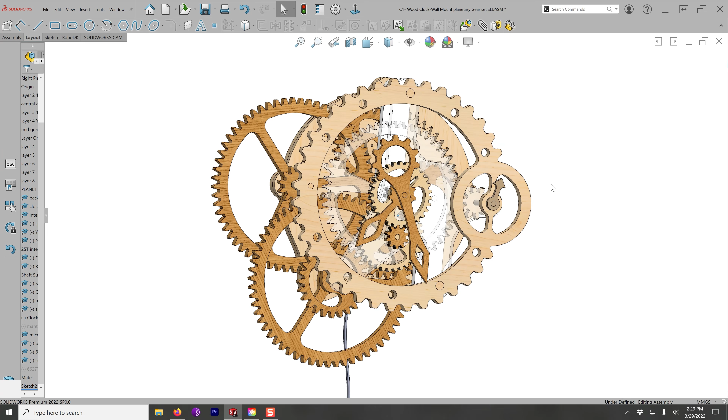I was digging through some old CAD files and I came across this design I made way back in 2014. Now at the time, I knew almost nothing about engineering. Well, even today I'm entirely self-taught. But looking through the lens of experience, I can see there are several things that I would have done differently had I made this clock today.

For example, the planetary gear in the back actually drags against that wall as the clock is spinning. Not only is that going to produce a lot of noise, but that's increasing the friction, making the clock work harder. That's one of the things that I intend to change about this clock.

Despite all of its flaws, I still think this design is very beautiful, and I would love to bring this thing to life. So I decided this would be a great opportunity to teach you guys a little bit about how gears work, and then also bring you along on this journey as I bring this clock to life. Let's get started.

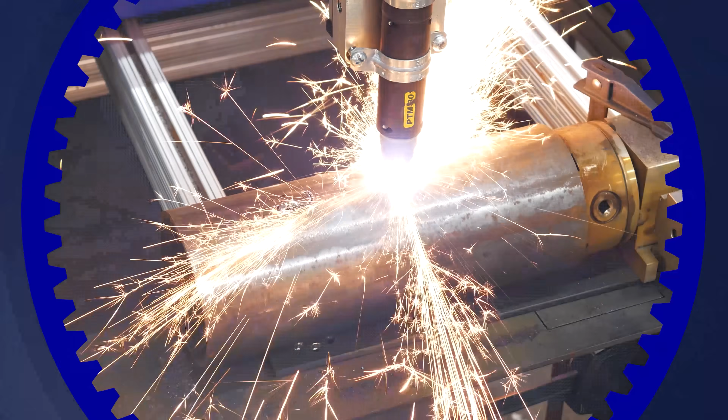Before we start building the clock, let's talk a little bit about gears. Now, when I wanted to explain this concept to my kids, I basically built the most ghetto seesaw you've ever seen, and we just experimented with it. If you've ever been on a seesaw, then you know what it's like to sit opposite of someone who doesn't weigh the same amount that you do. You intuitively shift your body weight forward and back to try to balance out your weights.

But what you're actually doing is balancing out the torques. Torque is a combination of the force being applied to the lever times the distance from the center of rotation. In this example, you can see my kids quickly figured out that if you have twice as many bricks, then the lever needs to be about half as long. The same thing is true with any sort of lever.

And now I want you to think about each tooth on the gear as being an individual lever. Since the motor connected to this gear has a fixed amount of torque, increasing the length of the lever means you decrease the amount of force that can be applied at the end in order to balance the equation. The same thing is true for all forms of mechanical advantage, including pulleys.

Looking at this pulley, for example, the center of rotation to the groove is the length of our lever. The motor itself has a fixed amount of torque. Therefore, in this case, we take the motor's torque divided by the length of our lever, and that's how much force we can apply to the belt.

So let me give you a pop quiz. If we put this pulley on the motor instead of this pulley, what do you think is going to happen? Hopefully you're saying to yourself, you should get way more force output on the belt for this one than this one. And you will be correct. The force that you can apply on this pulley with the same motor is going to be way higher.

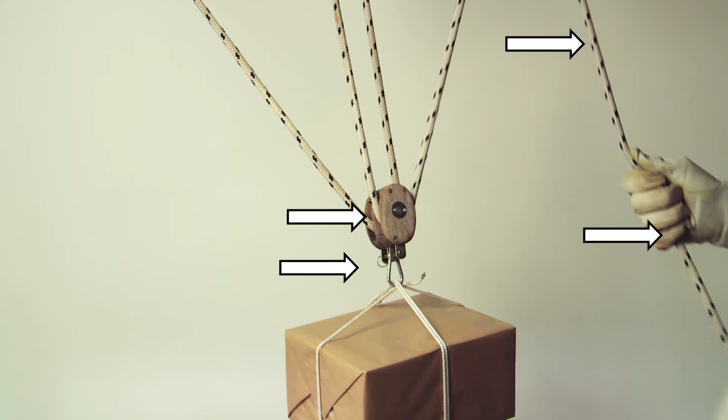Hopefully this will dispel one of the very common myths that I run into, where people think that you can just take pulleys or gears and increase the work output. That's not what these things do. There's something being given up with each one of these exchanges. With the block and tackle example, you can lift twice as much weight, but you have to pull twice as much rope through the pulley compared to the distance the load actually moved. Let's make one solid example so you really have this fixed in your mind. We have a GoKart. It can carry 100 pounds and drive at 20 miles per hour.

You can make those units whatever you like. This could be 100 kilograms and kilometers per hour, whatever makes you feel good. The key here is gears allow you to trade one for the other. So we can lower our carrying capacity if we want to increase our speed. And this would very likely be feasible with gears. You could cut your towing capacity in half and double your speed.

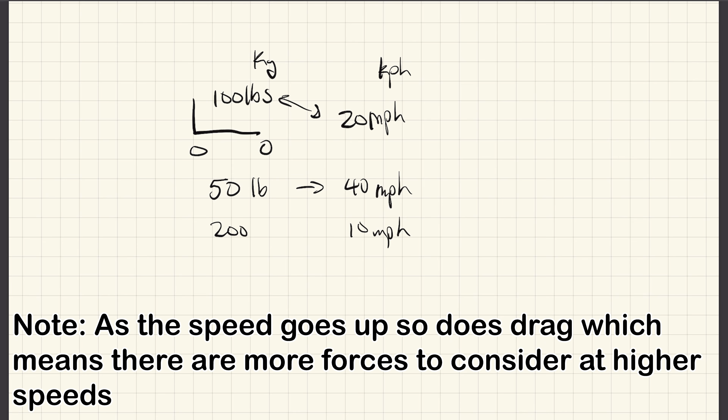The same works vice versa. We could cut our speed in half and double our towing capacity. But what you cannot do is leave the capacity the same and try to increase the speed with gears. This won't work because you need more power in order to increase the total amount of torque and speed combined. That's the definition of power actually, is speed times torque.

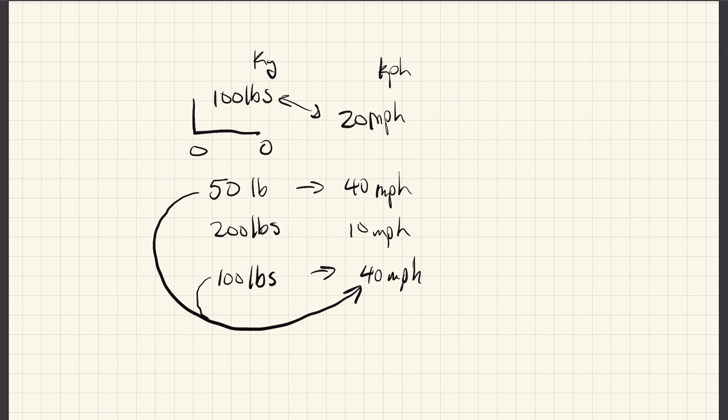Now, we can certainly get the wheels to spin at 40 miles per hour as long as the load is below 50 pounds. But if you try to carry the full 100 pounds, you're not going to get this go-kart to spin. In fact, it's just going to stop dead because there simply isn't enough power available. This kind of system would require a larger motor because you need more power.

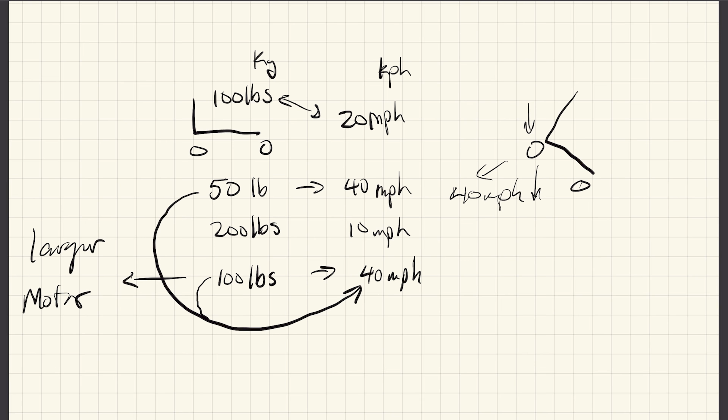If you took that same go-kart and you lifted up the back wheels, there's no load on these wheels. They will definitely spin at 40 miles per hour. But as soon as that go-kart touches the ground, it's dead in the water. It's not going to move. This is the trade-off that you're always going to experience with gears. They don't give you more power. They just allow you to trade speed for torque.

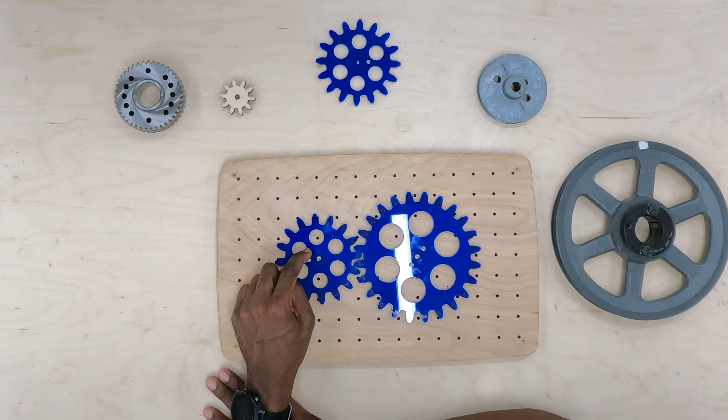All right, now that we have that down, let's go back to the clock. What makes the clock such a beautiful example of gears in action is because we need several different components to spin at different rates. And what better way to get those components to spin at different rates than with a series of gears? So let's make this gear our drive gear. If we attach our motor here and we start to spin this gear clockwise, two things are happening. Number one, the output gear is spinning counterclockwise. That's important for our clock.

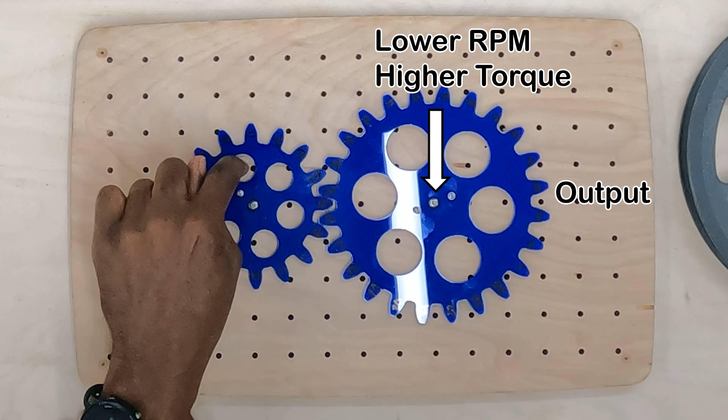If we want all our hands to spin clockwise, then we need to pay attention to which direction the output gear is spinning. The second thing you should notice is that this gear has a lower RPM. It's spinning about 2/3 the speed of our input gear. And that is directly proportional to the number of teeth. So this gear has 16 teeth and this one has 24.

If we switch this around and put the motor on this side, we'll get a higher output speed. In fact, we'll get 1.5 times the speed on this output gear, but we're going to have less torque or less lifting force to move our load. Finally, if you just want to flip the direction of your output gear, you can add one more gear in the series. And I don't have a pin to put that in place, but I'll just hold it like this.

And as you can see, even though this one is spinning counterclockwise, any gear attached on the outside, if I could hold it in place, there we go. As you can see, this one is now spinning back clockwise. This is the trick we're going to use to make sure that the output of our clock spins all the hands in the right direction.

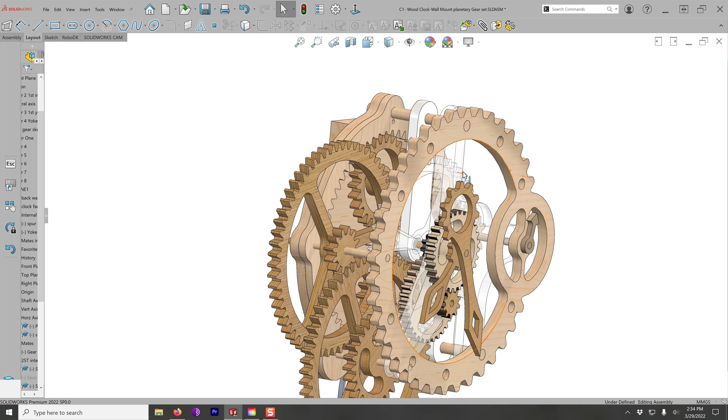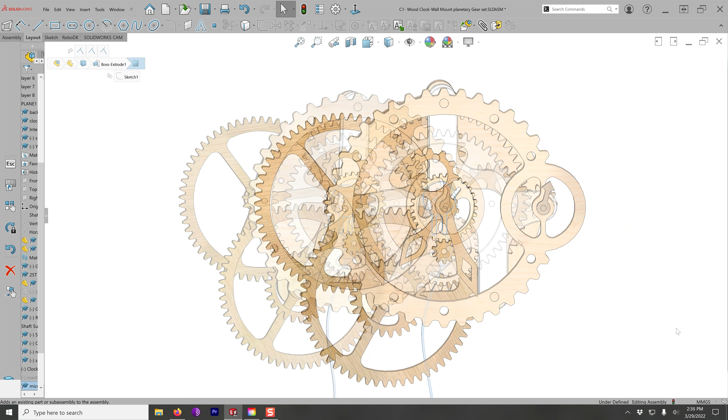Most of the gears, as you can see, have very large openings, which will allow you to see all the way through the clock. There are also way more gears than you actually need in order to change the 6 RPM of this little microwave motor to the speed needed to get the minute and the hour hand moving at the appropriate speed. One of the first things that I want to do is maintain that original transparency. One of the other goals that I had was to make all the teeth large enough that I could cut all this on a scroll saw.

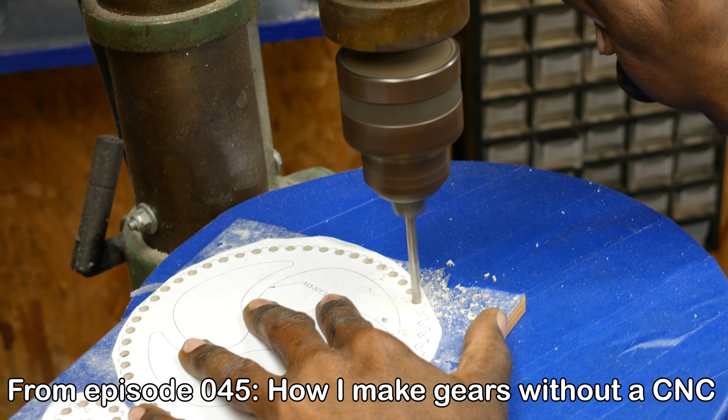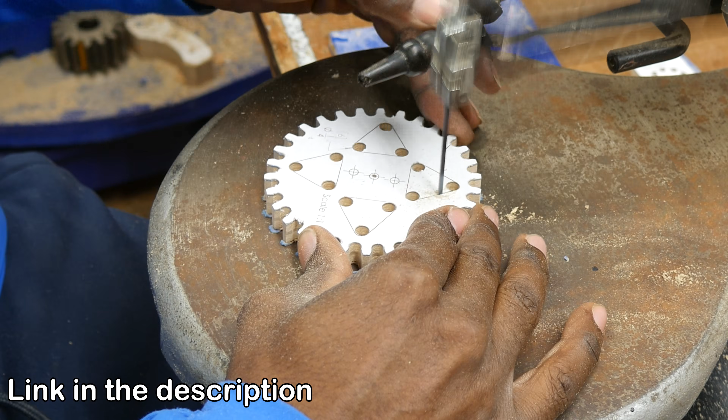This was before I had a laser cutter or CNC or any kind of tools that would allow me to make very precise gears. I wanted to make sure that the teeth were large enough that I didn't kill myself trying to make each one of these. But I also didn't want to have so many teeth in one gear that if I made a mistake, I'd have to scrap the whole gear and start over. It's one of the problems with making these gears by hand. If you have 96 teeth and you mess up just 2 or 3 of them, you've got to start over making those 96 teeth. And that's just awful on the scroll saw.

But today I don't have that problem, so I could change these to accommodate a higher number of teeth per gear, but I think the clock looks great the way it does, and so that's not one of the changes I want to make. As I mentioned in the intro, I need to beef up this connection here so that these gears can be cantilevered and not rubbing against this face on the back. I'm going to add a spacer here.

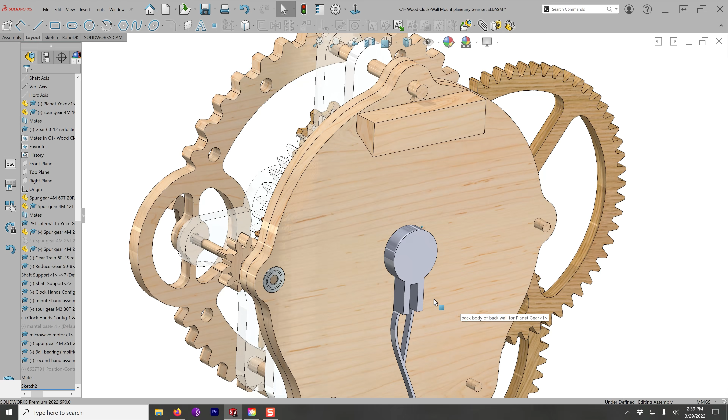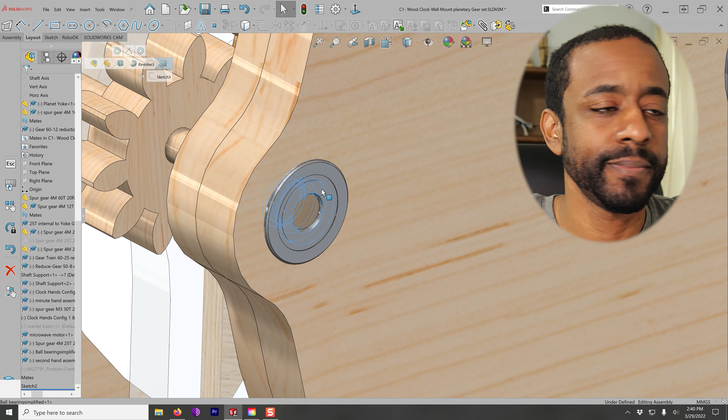Right now, this clock is being driven by a synchronous AC motor. This is the motor you would normally find in a microwave. It's the one that rotates the plate. The spin rate of this motor is very reliable to give you a consistent 6 RPM. I want to remove that and actually put a little stepper motor there and a small electronic setup that will allow this thing to keep time with the stepper motor. As you can see, there's a bearing here, but I don't think we need bearings for this application. The forces and speeds are very slow and very low.

I also had what I called a mantel base. I never quite finished it because I never finished the clock as a whole. The final change I want to make is make sure that all of these pieces can be laser cut. I think that just about covers it. So how about we crank up the speed of this video about 6 or 8 times, and you guys can watch a time lapse of me improving this clock.

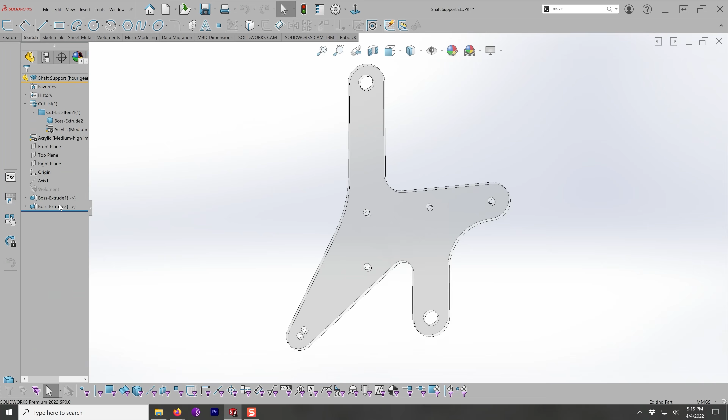In the original design, I used bearings throughout the clock because things are spinning, and so I thought you should use bearings. But in reality, the forces and the speed are very low in this clock. So I'm going to be using bushings instead, basically a custom bushing. So this is a brass tube. I've selected this tube and this aluminum tube because the fit is very good between them, so there's no custom machining needed. I specifically picked this size so that I could put an M4 tap in the end of this hole.

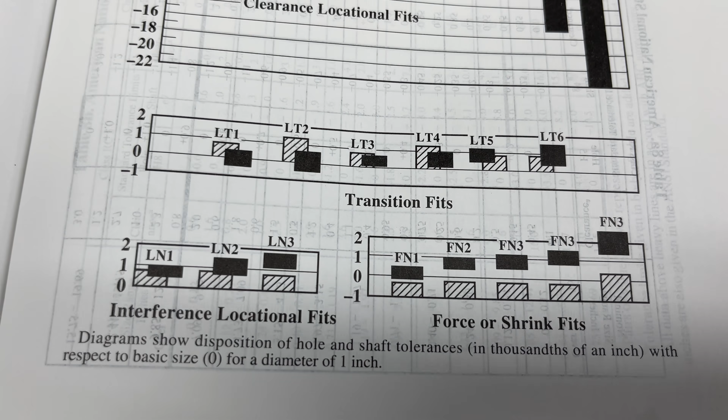Now what I need to do is take some measurements here and figure out how to make this a good press fit. If I was going to be machining the gears, then I would just go to my machinist handbook and figure out what tolerance would give me a press fit. But I'm using a laser cutter and I don't actually know the kerf of my laser cutter. Kerf is the width of material that's being removed whenever you cut something. So on a table saw, the width of the blade is your kerf. In this case, the laser cutter is doing the same thing. Even though it's ultra thin, it is something, and I don't know what that something is.

I have made a little test pattern here. We're going to cut this out on a laser, and let's see what size hole gives me a really good press fit. I'm going to say that's pretty good. Yep, okay.

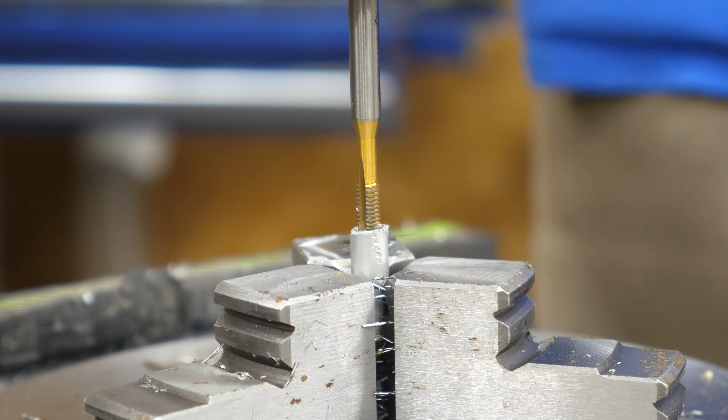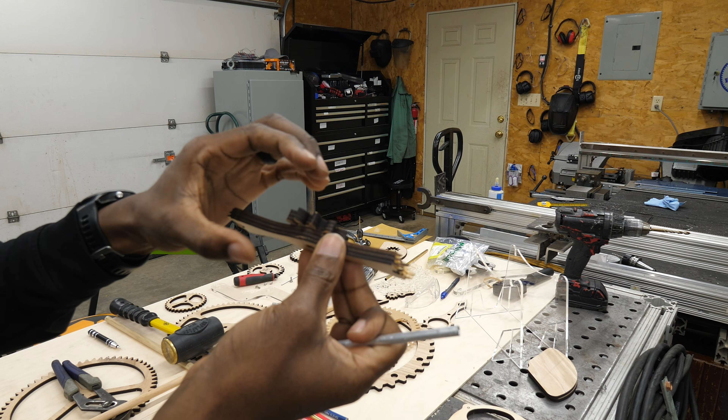I glued this up last night and left it clamped, and I unfortunately must have slid this piece at an angle when I was clamping it down, because now the hole is crooked and I need to remake this piece. So I ended up just tearing off these ends so that I could get the little metal pins back out, and we're gonna try to make this again.

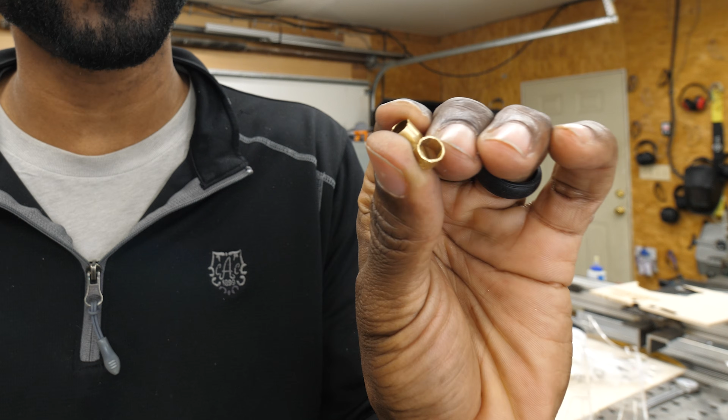I've been trying for a couple of hours now to make these little bushings, and you can see some of them need to be really small. It is not working out very well. As you can see, when I'm sawing it, I'm not doing a perfect job of sawing it. I've got that little burr, and that burr, despite my best efforts to clean it up with the deburring tool, is grabbing onto the shaft and making it where either I can't feed it in or I can't get it to rotate inside. Because it's so small, it's really difficult to work on this piece.

If I try to grab it with pliers or with a vise or anything like that, I deform it, and then you definitely can't get the shaft to go inside. So I've decided that these little pieces are just not worth the trouble it takes to make them. I'm gonna bail on this and buy myself a store-bought bushing. I'm gonna make the fit loose enough that I can just push in the store-bought bushing and then glue it in place. So that should work out just fine.

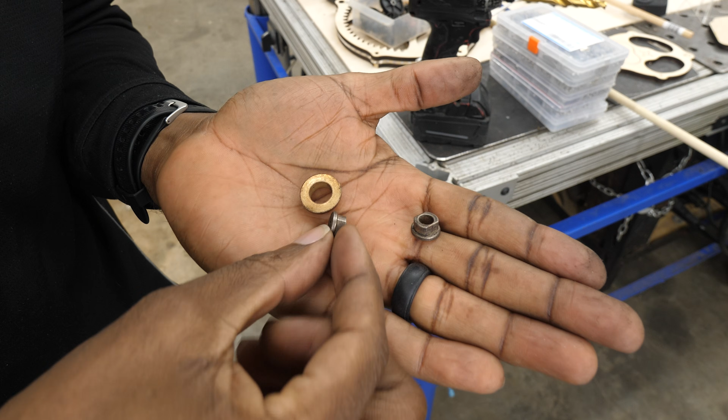I actually have a bunch of these here in my shop. I don't think any of these are the right size, but these are examples of bushings that I got out of a copier machine, a printer. This is what we're looking for.

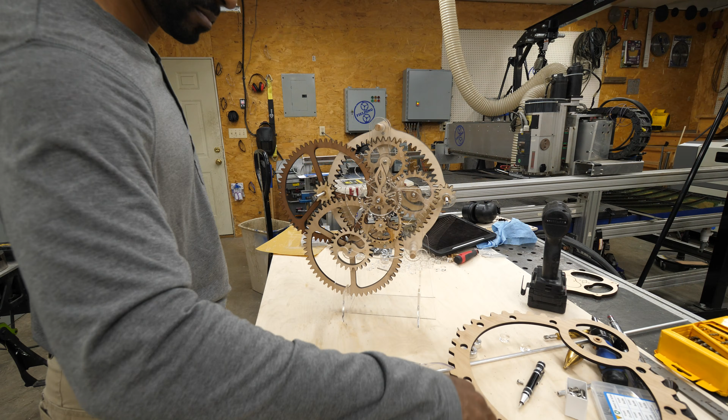Just when I'm about to start running the clock for the first time, my son walks in and I'm instantly hit with a great idea. Why not have my son write the code for me? Not only is he capable of doing it, but I love any excuse to get him involved in my projects. I want a really simple code with a variable at the top that lets me change the RPM. And that should be all I need. And the default should be 6 RPM, but we want to be able to adjust it.

Yeah, definitely will change that easily. Okay. So the drivers are on your desk too? Yep, they're both stuck in the same breadboard. This looks like my business as usual face, but I'm super proud right there.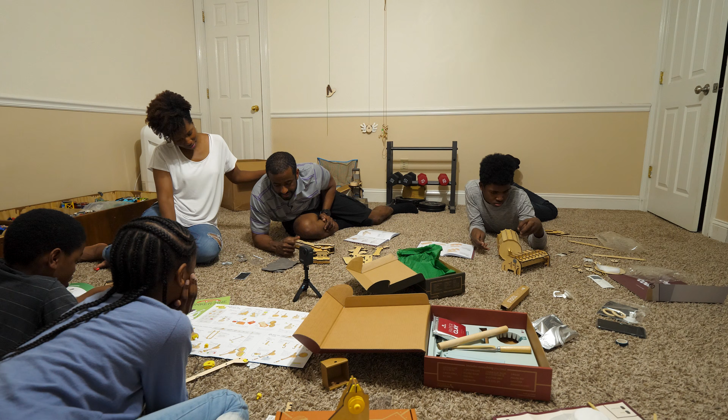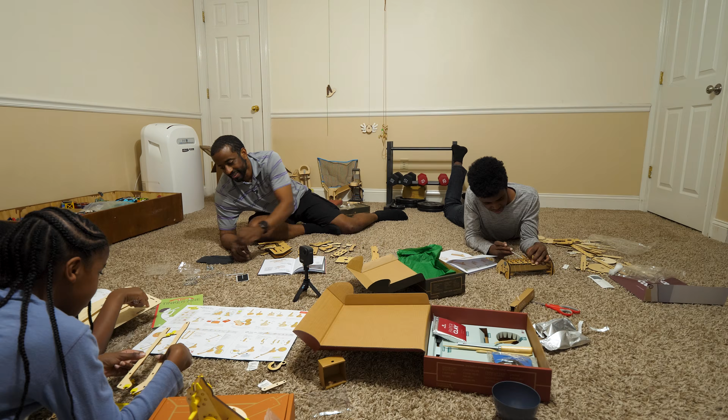Like, what's the difference between a screw and a bolt? We used to call them screws, now they're bolts. But they're the same thing because they have the same picture. Is there a difference, Dad, between a screw and a bolt? That is a hotly debated topic, ma'am. Ooh, get into it. And I'm sure if I leave that in the video, there'll be a huge discussion about that in the comment section. Like, well, actually. Exactly. So what is the difference between a screw and a bolt?

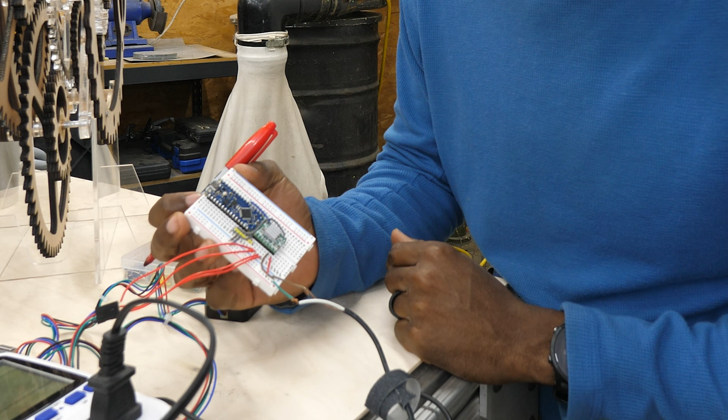You will not be disappointed. My son's worked on several projects with microcontrollers at this point, so I asked him to put this together for me, and he wrote the code. It's a really simple, basic code. I'll make that downloadable in the description.

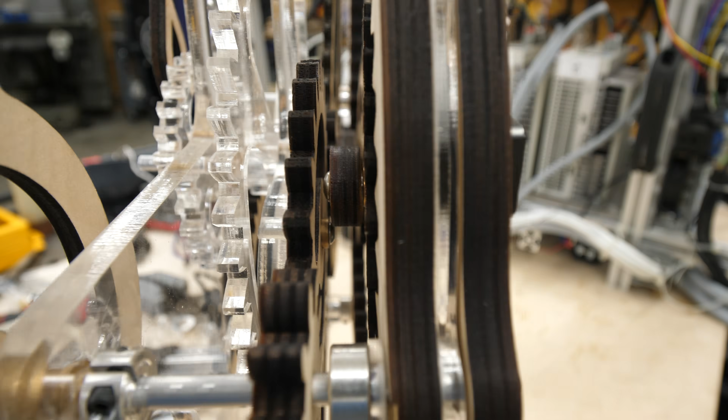Oh boy, I feel my heart rate going up. You know, I really should have tested this piece by piece instead of everything at once. I'm not taking it back apart to figure it out, so let's just see what happens. Oh, okay. So just a minor interference. I'm going to need to tinker around with the spacing there and get that offset just a little bit higher. And then hopefully that'll be the only thing that jams.

The next several days kind of went like this. I would disassemble the clock, add or remove spacers, reassemble the clock, it would jam after a few hours, disassemble the clock, rinse, repeat. Watching it like this, it kind of feels like it took a long time, but in reality it only takes about 5 minutes to disassemble the clock.

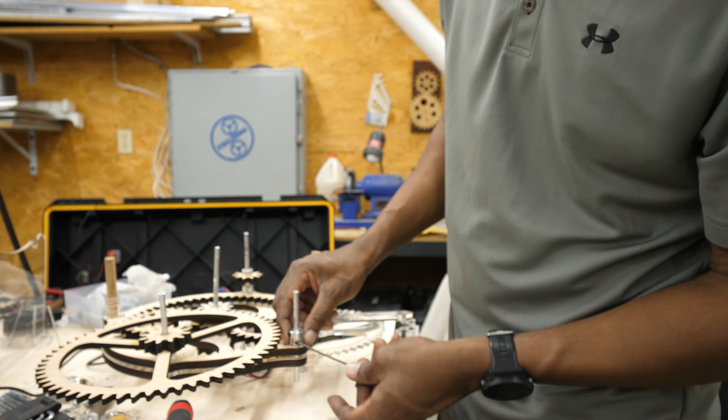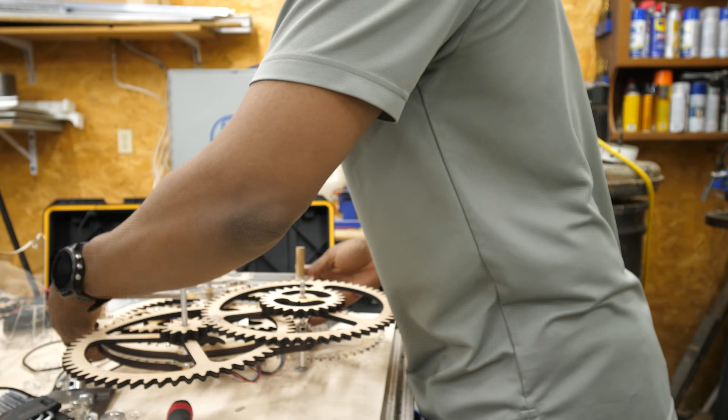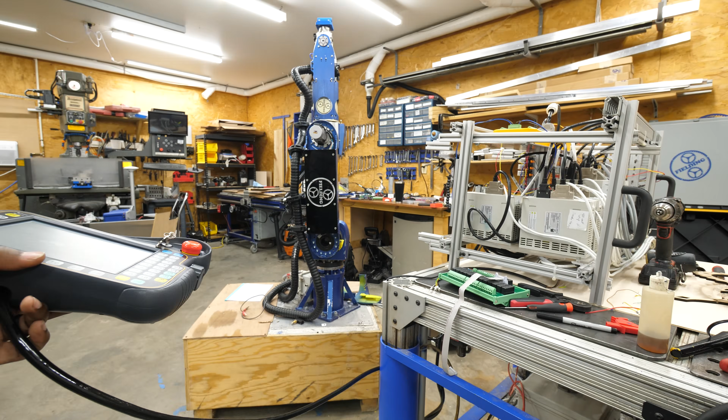And the only other issue I ran into was some of the gears weren't quite flat enough. So they would run for a while, but there was just enough wobble that they would only jam in some positions. So I ended up recutting a couple of the gears as well. Once I resolved the spacing and flatness issue, I had a working clock. The other good news is while I was literally waiting to see if my clock was going to keep running, I had an opportunity to work on Jarvis. I made some significant progress there, and I'm really excited about sharing that with you guys here in the future.

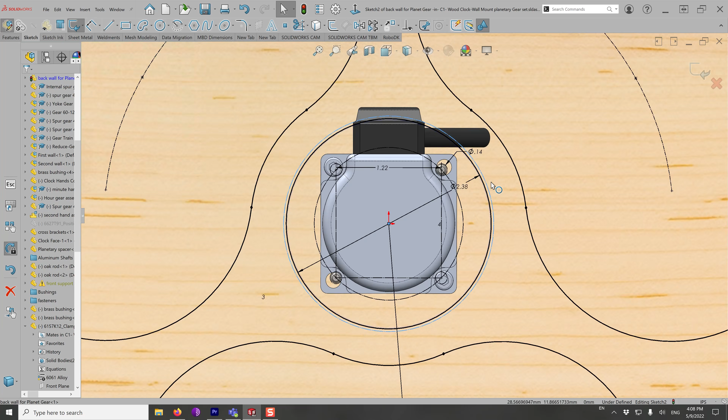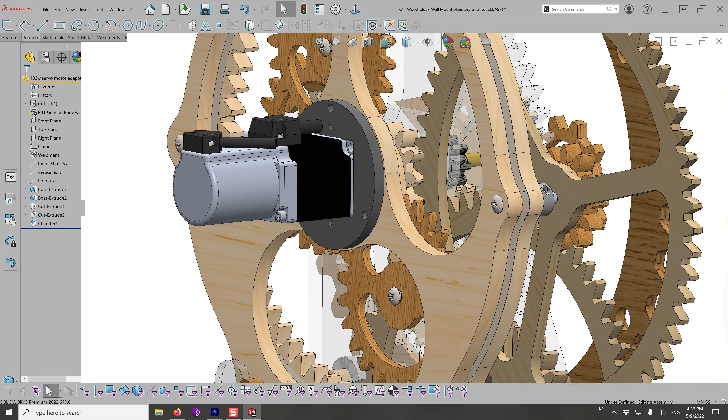Now that I'm done with the clock and everything's working, I've decided to go ahead and make one huge improvement. I want to design this back plate so that the motor is removable. If I can take this motor out and replace just the section where the motor is, that means I can not only try different types of motors, but I can also disconnect the motor and push all the gears in the train by hand to make sure that everything is working and there's no interference without disassembling the clock and without trying to backdrive the motor as well. Not only is that going to be a huge improvement in 2 categories, but it's a really easy change to make. So I didn't want to let this video close out without giving that a shot.

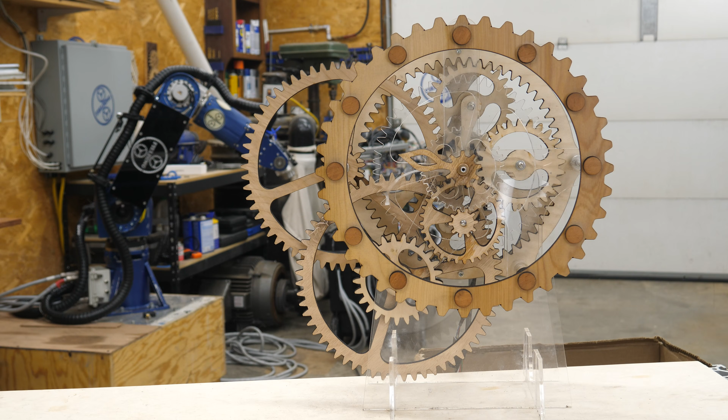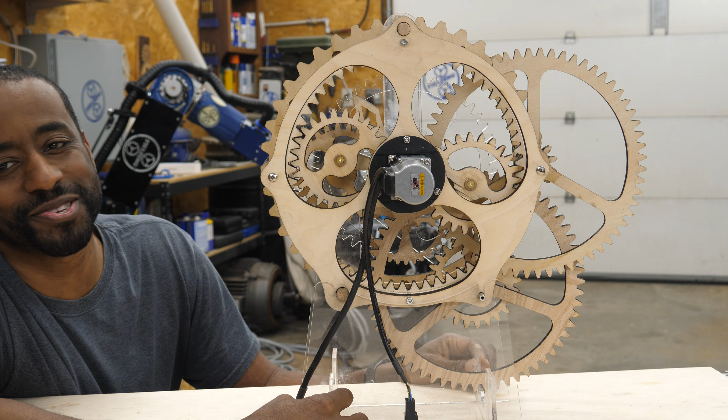I think we're ready to go. Final test run. It's looking pretty good. I'm really excited about how this turned out. As you can see, in this last test run, we were using a servo motor, which is super overkill for this application. It turned out to be way quieter than a stepper motor. I guess that's not surprising, but you could barely hear the clock at all while it was running.